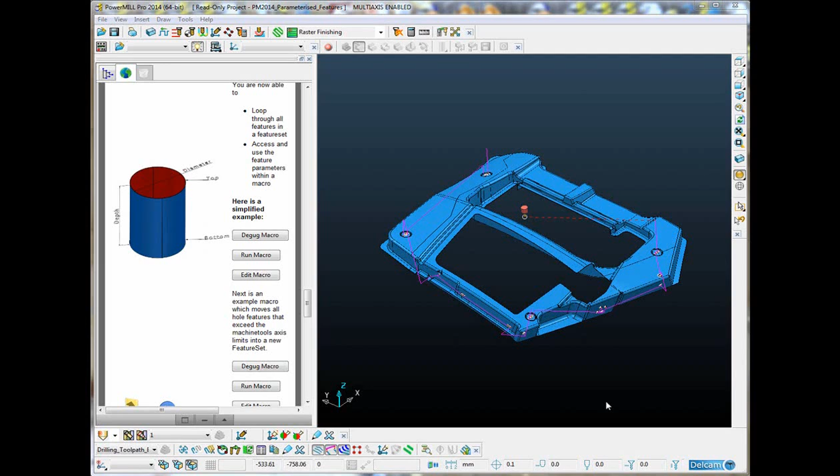The features inside a feature set are now fully parameterized. This enables us to access those parameters within a macro and to use them as we'd like. Let me start by showing you a very simple example. On the screen I've got a model with some hole features.

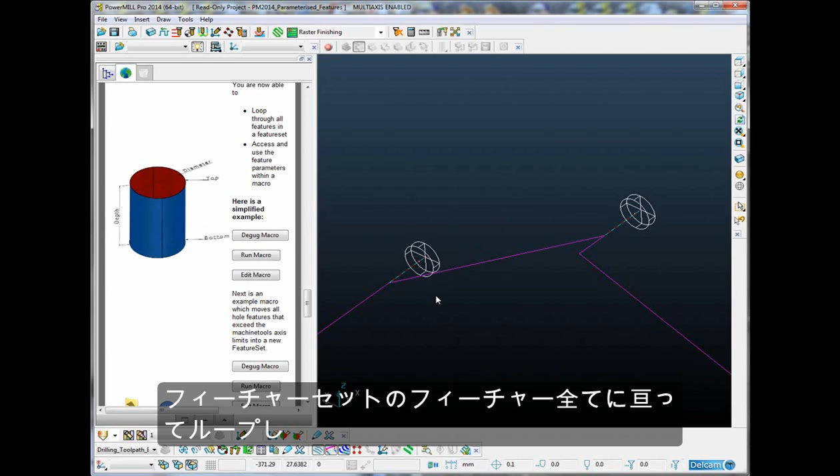The simple example I'm going to show you first is simply going to loop through each one of those features within the feature set and analyze the diameter, the depth, the top, the draft angle, etc. It's then going to pop up a message to the user informing us of those values. Let's just take a quick look at the macro, if I just edit that macro.

So the first thing we're going to do is just to create a new variable, a string variable with nothing in it. It's going to eventually contain the message that we print out to the user, but we're going to build this message throughout this loop. So this is the start of a loop where we loop through each feature within the feature set. That's exactly what this will do. $f is simply my own variable name.

Now the feature has got a number of subparameters. This is .name, which is the name of the feature. .type tells us if it's a boss, a slot, a pocket or a hole. The top and bottom are the Z values of the top and bottom. The depth is the distance from the top to the bottom. The diameter is obvious, and the draft is the draft angle. We also have the axis.

Now you'll notice I'm using print par rather than print equals for the axis, and that is because the axis is stored as a vector, which is what we call an array. Basically it's multiple numerical values, so it must be stored in an array, and we can't use print equals to print out the contents of an array. We must use the print par command.

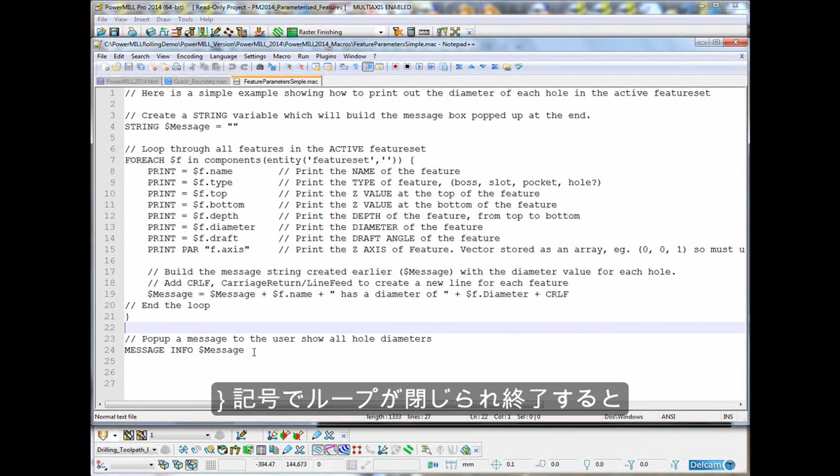And then we have a CRLF, which means carriage return line feed, so it adds a new line at the end, because this loop is going to go back, do the same for the second feature, add to the message, add a new line, go back, print out the values and add to the message for the third feature. Then after the end of the loop, which is this closed curly bracket here, it will pop up a message using the message info function $message. So let's try running that macro.

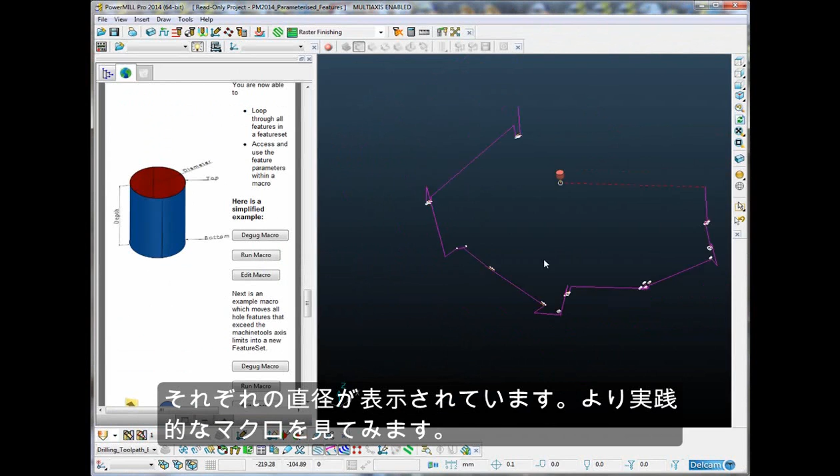And there you can see it's looped through all 39 features, and it's told us the diameter of each and every one of them. So let's look at a more practical macro. So this is a little bit more realistic.

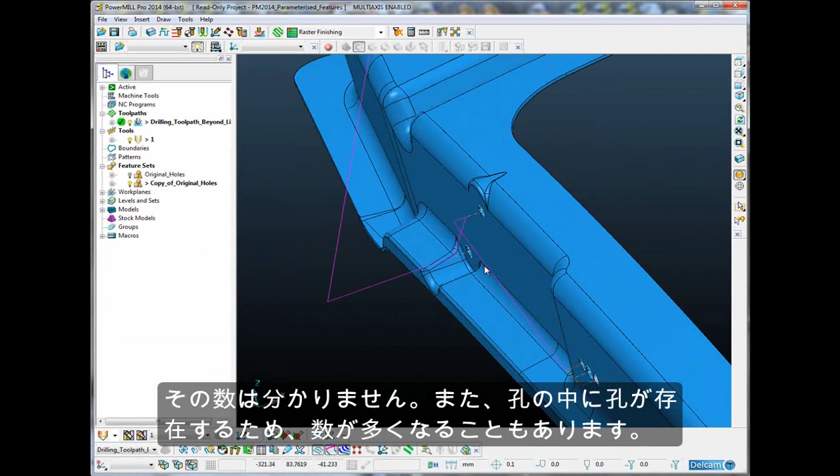Now one of the problems I have with this particular drilling toolpath is that some of the holes go beyond the tool axis limits. Now I'm not sure how many, and sometimes these toolpaths have a great deal of holes in them, and I obviously can't machine it if it's beyond the tool axis limits. So this one looks okay, but I don't want to have to go and analyze each and every one of them. So what I've got is a macro which analyzes the tool axis.

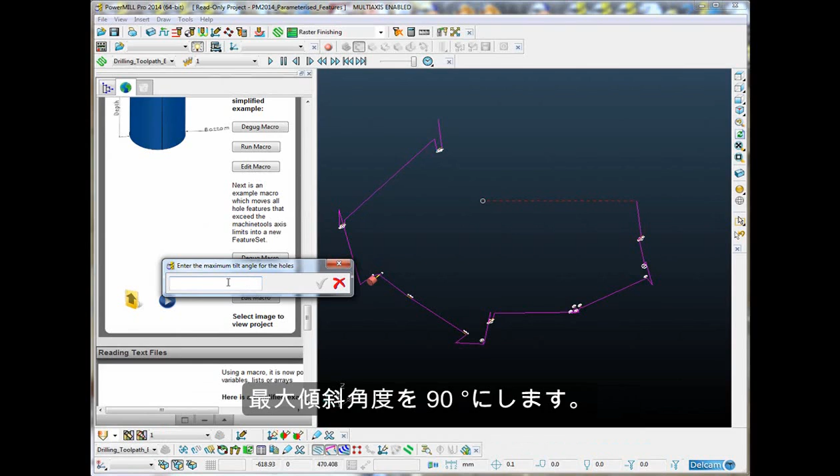It will ask me what the maximum limit is, so if I just run that macro, it asks me what is the maximum tilt angle for the machine tool. Now I'm going to say my machine tool can tilt to 90 degrees and no more. It's going to analyze every hole, and it's told me that 6 features were out of limit and they have been placed into a new feature set which is a copy of the original.

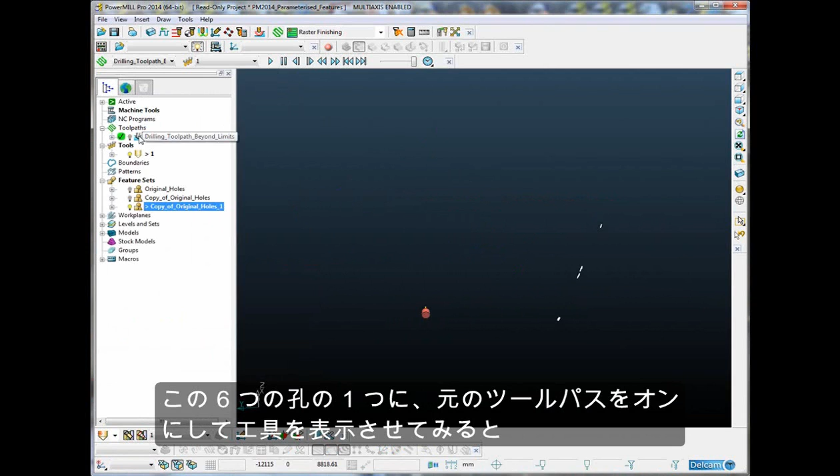So let me just switch off that toolpath for a second. It's actually removed all of the holes which were out of limits, and it's put them on a new feature set. Here they all are, these 6 holes. Now if I look at the original toolpath and I just attach the tool to one of those particular holes, we can see that it is well beyond the 90-degree limit.

So what I can do now is recalculate this particular toolpath using not the original feature, but the new feature set which the macro created, and just recalculate that, and now everything will be within limits.

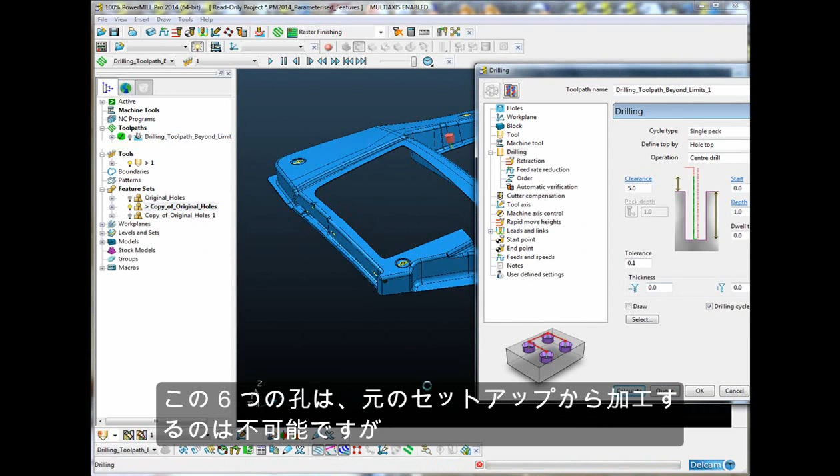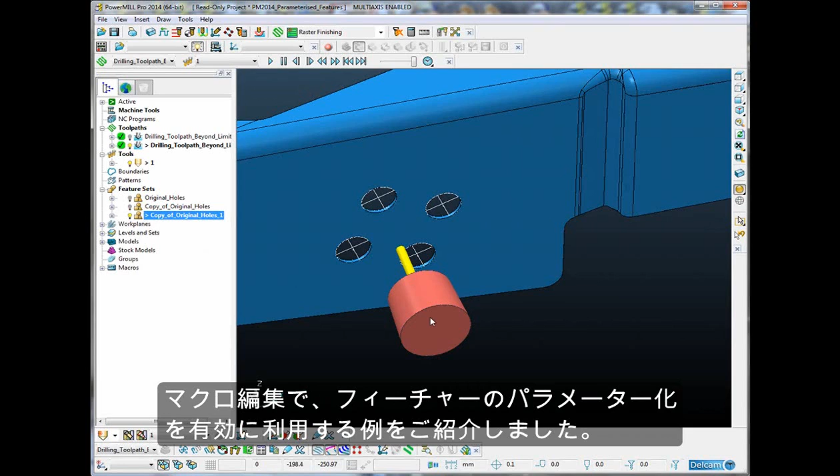Now unfortunately I still have 6 holes which I have not machined, but it's simply impossible to machine these 6 from this setup, but because they're in a new feature set, here they are, I could machine them from a different setup. So that basically is just one example of why the parameterization of features is a great thing for the macro writer.